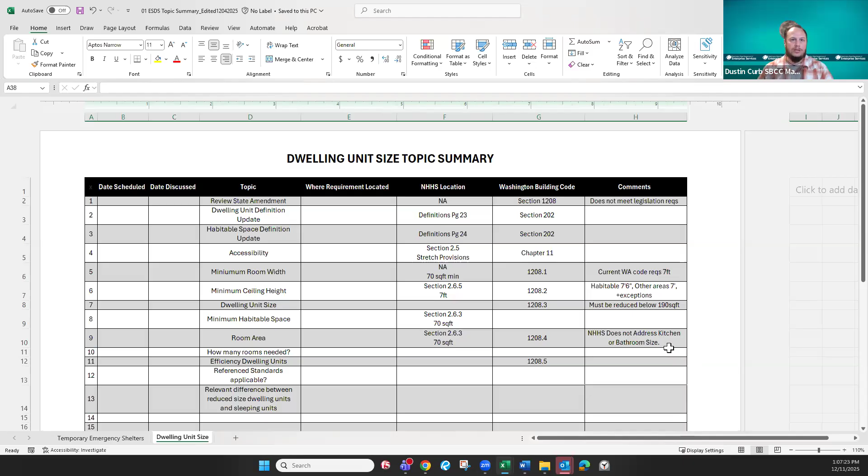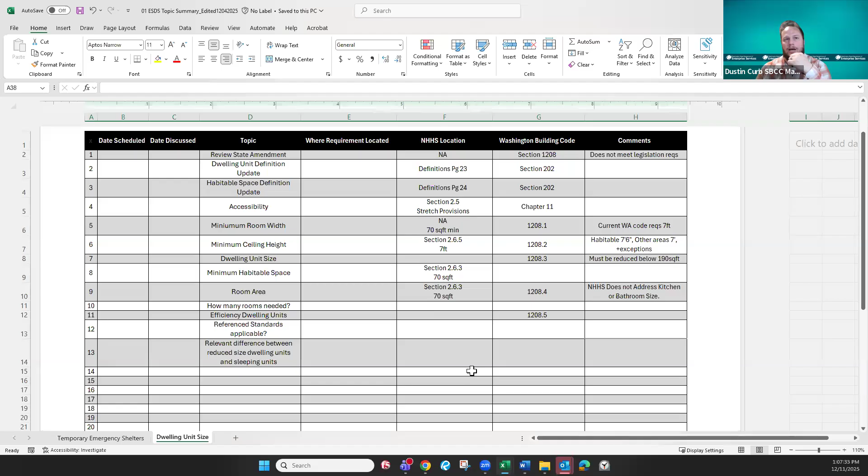We didn't really get any hard mileage down. At the last meeting we made a couple talking points on the topic summary, but I don't have any of these specifically crossed off as finalized for what we're talking about on each of these topics here.

Okay, so again, our goal is to close this up pretty quickly. We can put language behind it, but the idea is we don't necessarily have to go one by one. I think we need to dive into the key catalysts, I'll call them - which ones are the real deciders, and which others might be more secondary and fall into place after a couple key decisions are made. Is that an okay way to present this to everyone, and then allow anyone to grab a topic?

I think we've done a decent amount of research on this. So does anyone feel they're not up to speed enough to understand the scope of the problem? Okay, not seeing anyone. Can someone offer or propose a topic to zero in on?

Go ahead, Michael. And my unmute button here.

Not necessarily a topic to home in on, but one of the thoughts I was having on all of this is: here we are, the legislature is saying we need to have something less than whatever square footage, and if we define what a minimum dwelling unit has to include - such as a habitable room, a sleeping space of 70 square feet, a habitable room of 120, a kitchen, and a bathroom with sufficient fixture clearances and so forth - why do we even need a minimum dwelling unit size?

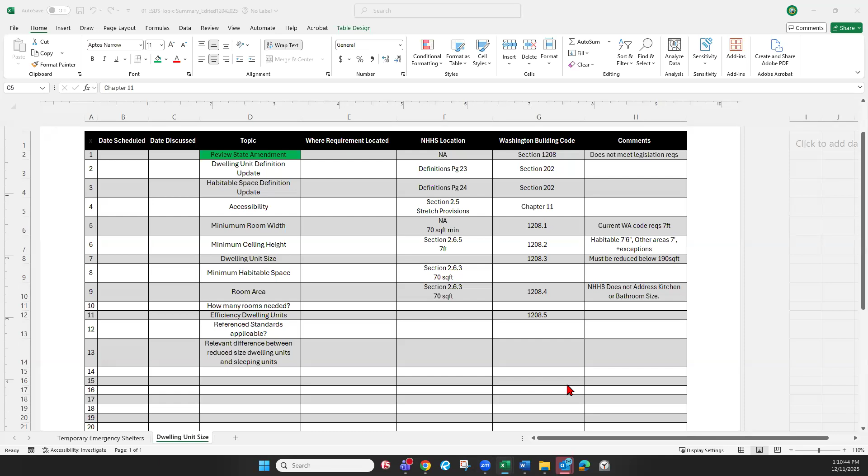Thank you. It's interesting - along this line of thinking, that's kind of what a performance code is. I just got up - by the way, if you're not tracking, we just had a kickoff meeting with NIBS, National Institute of Building Sciences. Is that correct?

I guess you'd call it a non-government agency established in the 70s to perform standards, especially for HUD, or to develop standards. One of the things this committee is taking on this year is establishing these kinds of standards for states to adopt and amend. Anyway, I don't want to take us off track, but it's interesting we're talking about this at the same time. Go ahead, Micah.

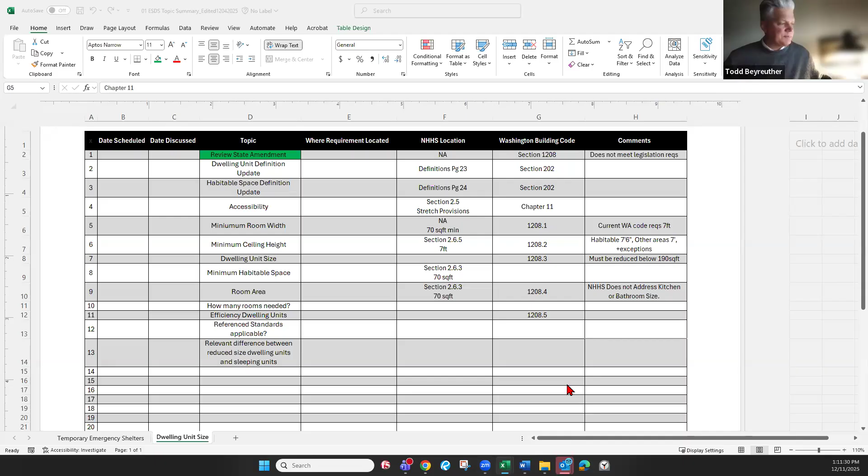Thanks for that input, Todd, on what's going on with other groups and organizations. I know that ICC is discussing this as well and how this ties into middle housing and all this other stuff that's going on, single exit as well for the national level.

I did have some concerns with the comment from Mike and Steve about getting rid of minimum dwelling unit size. I think that's simple for the dwelling unit size itself, but it doesn't take into account the entirety of section 1208 of the code, which has minimum room widths and ceiling heights, and then habitable space. What does that look like in terms of the overall size of the dwelling unit? What's included in a dwelling unit?

Are there spaces specific to those? When I say that, you get into 1208.1 where it talks about kitchens having a clear passage of 3 feet, the rooms not having any dimension less than 7 feet. If you just go a 7 by 7 foot square - I know some folks want to interpret it as a 7-foot circle, but that was discussed at the national level, and most everybody sees it as a 7-foot square.

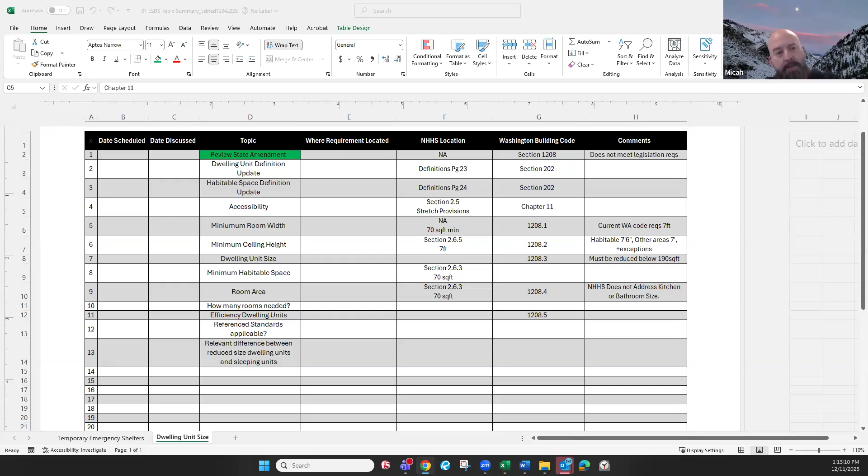So you're not necessarily throwing that out if you just get rid of the minimum dwelling unit size. So what's the balance is kind of the question I'm getting at. Are we taking into account the rest of those items in section 1208 that deal with interior space dimensions? And if that was the case they wanted to go with, then we would be alluding to getting rid of efficiency dwelling units as a whole.

Which I'm okay with. I apologize that we haven't gotten you a formal proposal, but Dustin and Todd, I just sent you an email with some proposed language that goes to what I've talked about before. One part of that is eliminating the efficiency dwelling unit altogether, because if we're only looking at no minimum dwelling unit size, then some of the other sections of 1208 need to be modified or removed.

Thanks, I think that's a great observation and comment there, Micah. It starts to sound like the same conversations we're having in the development codes - kind of redundant. Sometimes we go by lot coverage, but we also have dimensional standards, and maybe we're putting layer upon layer, and we need to actually just pick an approach - more of the dimensional approach in lieu of an area approach, or maybe we don't get there. Go ahead, Michael.

I was just going to clarify - I too think it's extremely important that we do continue to define the interior space dimensions. Essentially, we do need those minimum room dimensions, the ceiling heights, the area of the room, the area for plumbing fixture clearances, and so forth. All I'm suggesting is the overall, where we have that 190 - that's the piece that seems like we don't necessarily need to specify.

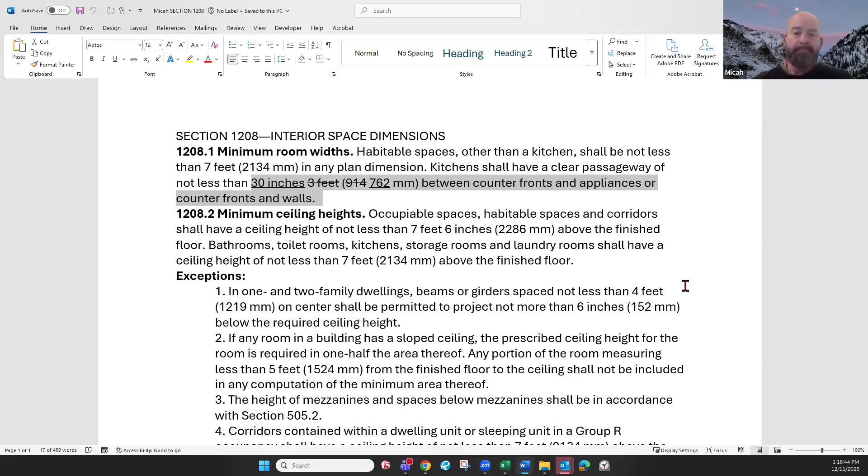And then if you scroll down for me, I appreciate it. This is where it got to eliminating the 190, which was just mentioned as well, but it's maintaining that at least one room of 120 be provided. And then you can discuss if you want to get rid of the sleeping units or other habitable rooms having a net floor size. Again, that'd probably be a pretty major shift that has to be evaluated. And then maintaining the exception that kitchens do not have to have a minimum floor area, you just have to provide that clear space in front of the appliances.

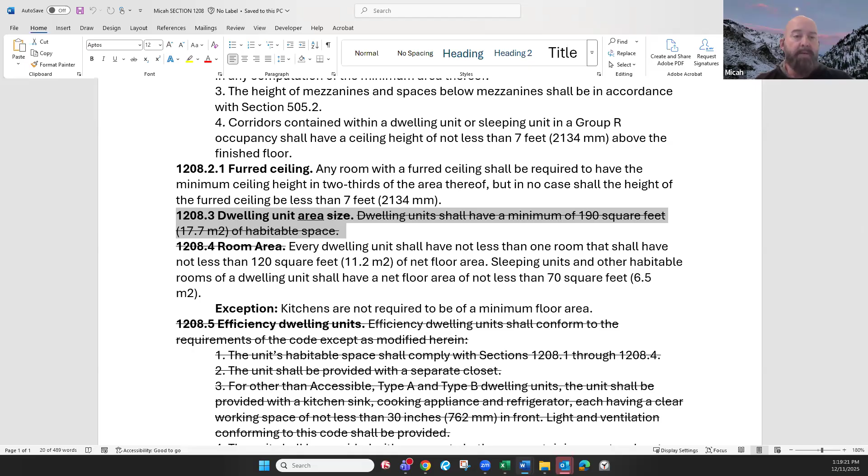And then, of course, with this, if you're not looking at any other habitable spaces in a unit, then the efficiency dwelling unit just kind of goes away. It's a defined term. I didn't put striking the defined term in there, but I believe that would be appropriate if we went this route as well. It only says that everything's provided in one room. But if you're only providing one habitable room and we're looking at a dwelling unit moving forward, what's the point in having this additional language?

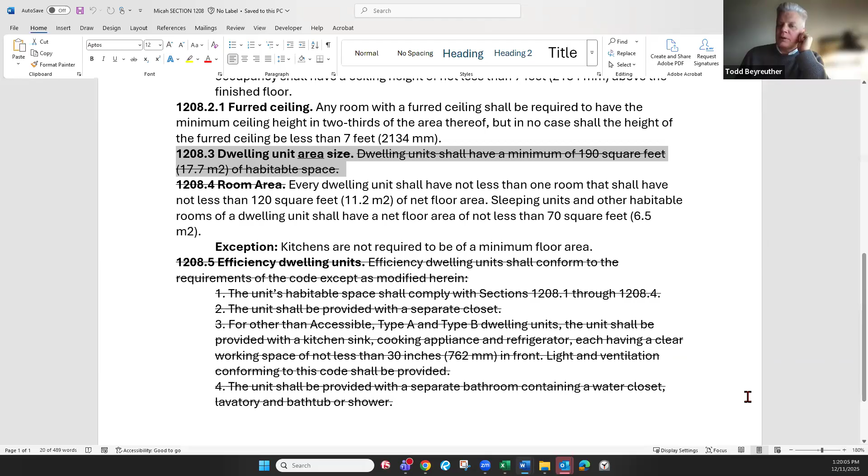That's great, Micah. I think this was a path to try to find a balance, is all. Thanks for looking at it. Can I propose that, since we kind of have the brain trust here, can we also talk a little bit about what criteria or performance requirements this is trying to meet if we're putting in different words?

So let's start with that first one, just the 30 inches, for example. What does that achieve? Maybe it's obvious to everyone, but if we were to actually have to write the criteria, what is it achieving?

I think it's just providing some minimum space in front of appliances. Usually when you look at these smaller spaces, they're not going to have full size appliances. In small space design, you don't need as much space or clearance in front of them. So I think that was the allowance, like, hey, you can get away with a smaller space if you're not having anything full size. A lot of these smaller units may not even have a dishwasher. If they do, maybe it's a cabinet-depth drawer that pulls out, so you don't need that big space.

Some of this stuff seems like Captain Obvious, but it's like if we asked what would happen if we went to 24 inches and why is that in the code, right? Go ahead, Hoyt. Yeah, I hate to play devil's advocate, but a lot of stuff in the code is actually made up where people come to consensus and a view.

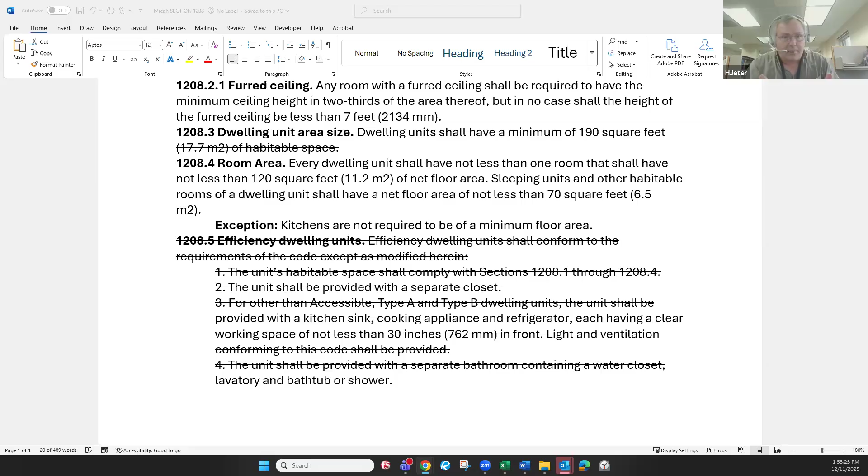So I think efficiency dwelling units, and then if you go back up, what Micah is putting in are two different things. They're not the same. We're doing something where we're just trying to make smaller units, but it still needs - where you have to have an accessible unit that's required for XYZ reasons, you need to meet that. So that was the reason why I said it, and I know Mike has said it doesn't matter. I would like to keep it - if it comes to a vote, I'm going to vote against it just for that reason. I think 3 feet should be the correct one. It does not have to meet the type A and type B type of units in there. So...

Okay, that's helpful. Okay, Che. Yes, I want to go back to the last meeting that I attended on this matter, where we had David Neiman present a version of this Section 1208, and also an article that he wrote giving dimensions to these units, which I thought made a lot of sense.

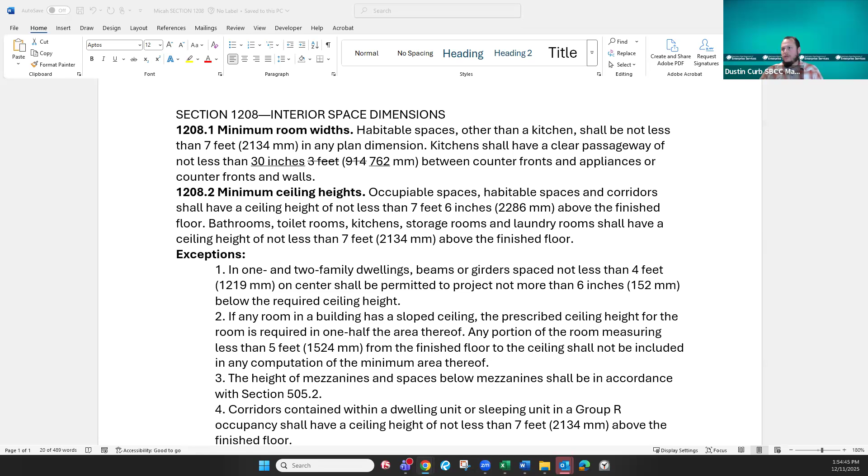Do we have a record of that, Dustin? Is that something that you can share with the team? I'd like to review that against this proposal of Micah's. Yeah, I can get that. I don't have it uploaded for today's meeting, but it's definitely in the history of the meeting documents. So if you want, I can pull that up and send that out to the group.

Okay, thank you. Thank you, Che. Go ahead, Mike. Just then I have a question to add. I think that one was headed the right direction. Okay, I need to go revisit that too because I don't think I was there. Thank you, Che. Go ahead, Micah.

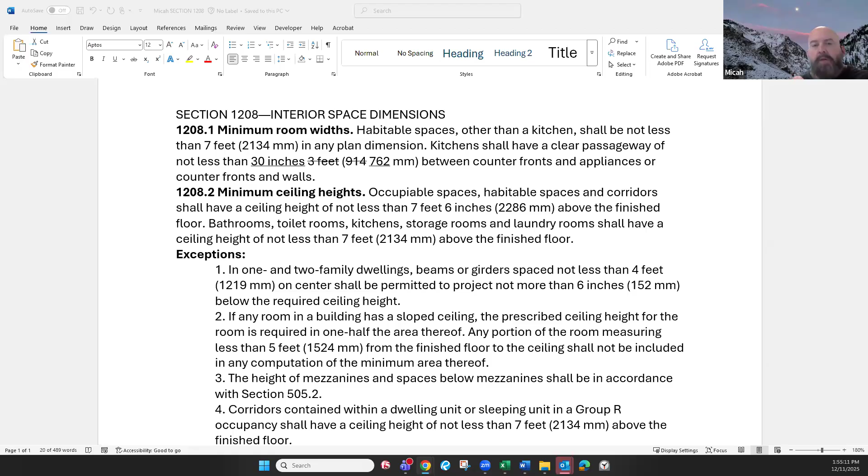I think David's was going towards just the 70 square foot straight across, but I don't think it took into account all the other room dimensions or other items in 1208. But we can come back to that one - I think it'd be a good comparison.

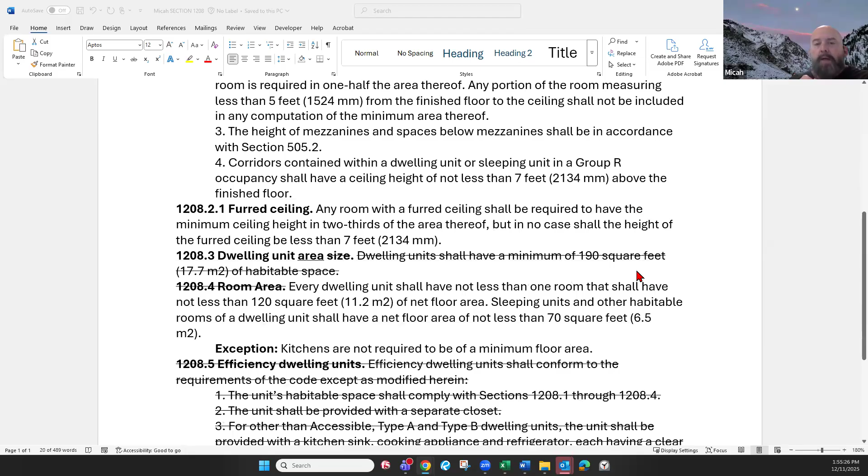Dustin, if you can scroll down to 1208.3 on this one - it really, and maybe I should have broken this out not in order, because the strike-through and underline of efficiency dwelling unit really comes down to if you want to accept the size of what I'm striking through in 1208.3, or what's left of 1208.4, which is the dwelling unit size having one room of 120 and the others would be 70.

The rest of this code proposal kind of hinges on that, aside from the 30-inch kitchen item. But if you don't want to go that route and want to go smaller, you're still going to end up with these same questions because you're eliminating a minimum dwelling unit size area.

And I'm going to jump back to the efficiency dwelling unit item and striking that through, and why for all dwelling units it's not necessary - because toilet and bathroom facilities are in 1210, and then the separate closets - closets aren't required at all in dwelling units. So again, when you put all that into one room, it was kind of a 'hey, you're going to be allowed to do this in one space, but you need to provide some additional items in that space,' which is the closet and other things.

So I don't know - I think Michael had talked about maybe keeping the bullet points in from the efficiency dwelling units, but I think it's covered elsewhere because those things are required elsewhere in the building code.

I appreciate the discussion today. Thanks, folks. Yeah, likewise, I think this has been helpful. Okay, I want to make people uncomfortable - so capturing all of this energy we had today and giving guidance to next steps.

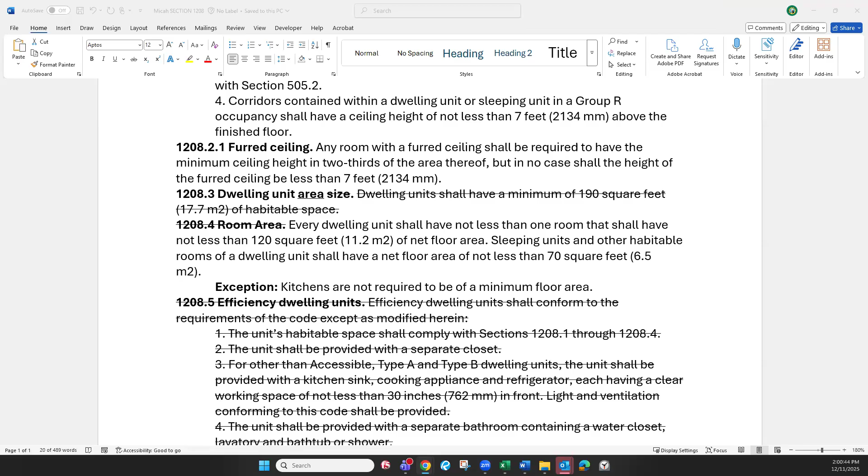I do too, and I like this conversation, and I think this section is small enough. I think all of our homework should be to come back with what we heard today and submit it. Maybe not everyone will, but that's what I'm gonna do. Let's all share that, and then we can move forward. But I think this was healthy, and this was the kind of conversation at least I wanted to have. So thank you.

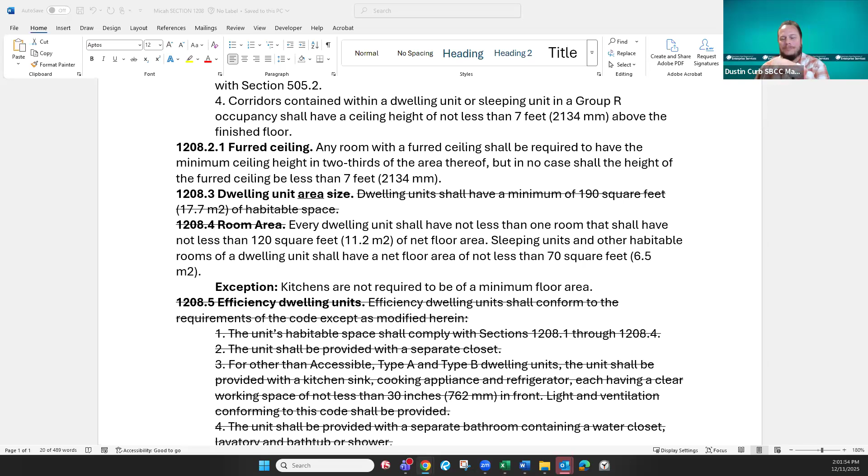All right, hey, I want to say one thing before everyone gets off. Go ahead. Happy holidays and a happy new year, that's all I want to say. Yes, thanks, Hoyt, likewise everybody, do what Hoyt says. All right, thanks everybody, thank you. Thanks, Dustin. Very welcome.